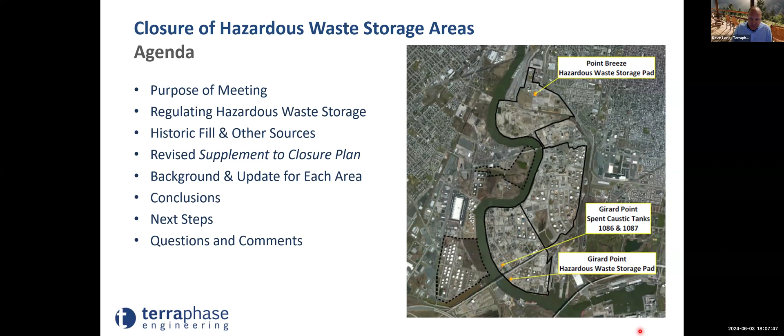So the purpose of this meeting is really just to catch everyone up, to give everyone an update on the status of where we are with regards to this closure effort, and then also to give each of you an opportunity, if you wish, to ask any questions related to this overall closure process.

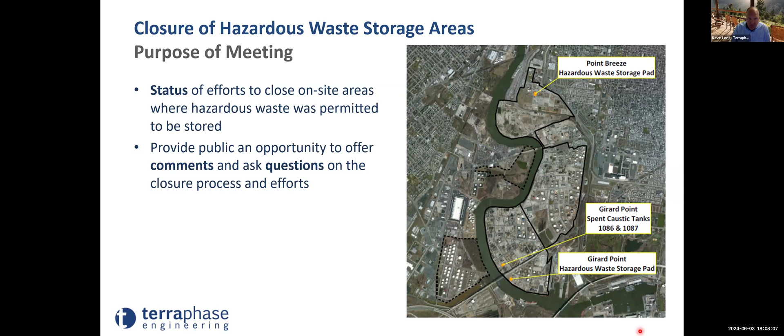Now, I want to step back a little bit and touch on hazardous waste and the regulations that pertain to it, and then even the hazardous waste closure process itself.

So hazardous waste is material that is generated at industrial sites, including at refineries. There are different classifications or categories we put hazardous waste into. You may hear them referred to as toxic or corrosive. You can see them on the left-hand side here: ignitable and reactive. Those are the categories that we give hazardous waste.

There are federal and state regulations that govern the management of this material as it's generated at these types of sites. Those regulations not only govern how that material needs to be disposed of, but also how it needs to be handled immediately from its creation all the way to its eventual disposal.

Part of those rules require or provide for an opportunity for limited areas of a site to be used for storage. In this case, the three units we talked about on the previous slide. Those storage units give a facility something that they can temporarily, for a short period of time, manage that material before it can be moved off-site for proper disposal.

Now, those storage areas actually have to follow very strict guidelines. In addition to undergoing inspections, there's all sorts of labeling requirements and record-keeping protocols that the facility has to use in handling this material. Now, when a storage area gets to a point at which it's no longer needed, it will go through a closure process.

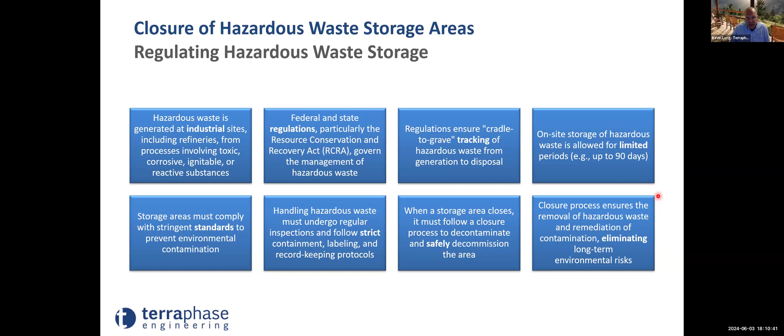So as a bit of additional background, one of the things that has been observed throughout the entire facility is fill material in the form of gravel or used asphalt, in some cases brick, that was used to actually level certain areas of the site and other areas of Philadelphia as part of historic development. These are low-lying areas that were filled with these types of materials, and the state refers to this type of material as historic fill.

Historic fill can oftentimes include things like certain metals, so arsenic and lead are examples. You can also find low levels of certain chemicals that we refer to as semi-volatile organic chemicals. Part of that group includes another family called polycyclic aromatic hydrocarbons. You may hear me during the course of these slides refer to PAHs. That's really what I'm referring to, certain chemicals that fall into this semi-volatile category that we find commonly in this historic fill material.

What PAHs really are is just the result of organic material that has gone through what's called incomplete combustion, basically burning. So you can find it in situations where you have burned wood, gas, or oil.

You can even find these chemicals on the charred portions of grilled meat. Any organic material that goes through incomplete burning ends up generating these chemicals as a result.

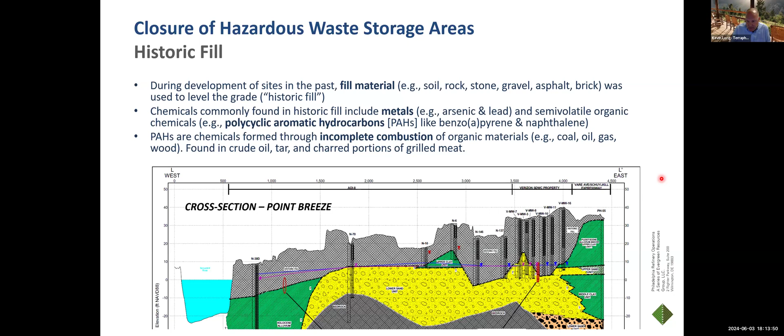The other condition we have here involves other impacts that may be associated with other aspects of operations at the refinery that previously occurred. You'll hear me refer to these as pre-existing contamination, or contamination associated with other refinery-related activities.

This is important because when we go through the process of closing these types of units and conduct sampling, one of the challenges is figuring out whether what we found is associated with an actual release from a unit like this, or whether it's associated with other aspects, such as fill or other sources of contamination.

That's not to say that contamination from other sources like fill would be ignored or tossed aside. In fact, it would be managed in a different way under a different program. You'll hear me refer to this as Act 2, which I'll get into in a bit. Any contamination identified that we determine is not associated with these units would then be addressed under Act 2.

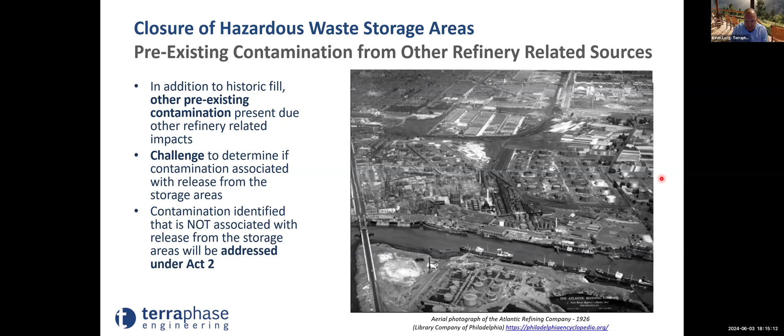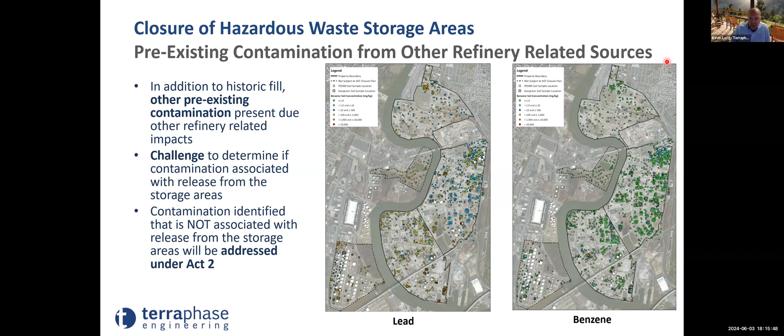That can include things like lead, which can also be associated with historic fill. The graphic in the middle of your window is a presentation of all the soil sampling locations where lead has been analyzed at the site. You see the same thing here for benzene. We can use this information to help us understand whether what we find is associated with a release from a unit, or whether it might be associated with these other sources.

I previously mentioned Act 2. Act 2 is a cleanup program established in the mid-90s by PADEP. It encourages the cleanup of various types of sites, and part of that program establishes standards or cleanup levels that we can use to make decisions about the need for action, or to understand the nature and extent of contamination using these generic cleanup levels.

These are referred to as medium specific concentrations, or MSC for short. The image on the right-hand side is an example of one of the tables presenting these cleanup levels. This table shows, for a list of chemicals, numbers based on residential exposure and others based on non-residential exposure. These cleanup levels are divided into two groups: numbers based on direct contact exposure, meaning humans actually coming into contact with chemicals in soil.

And then there's a second set of numbers associated with the protection of groundwater—chemical concentrations in soil that, if met, should not pose a risk to groundwater, which would be a problem if that groundwater were used for potable purposes and those contaminants were to leach.

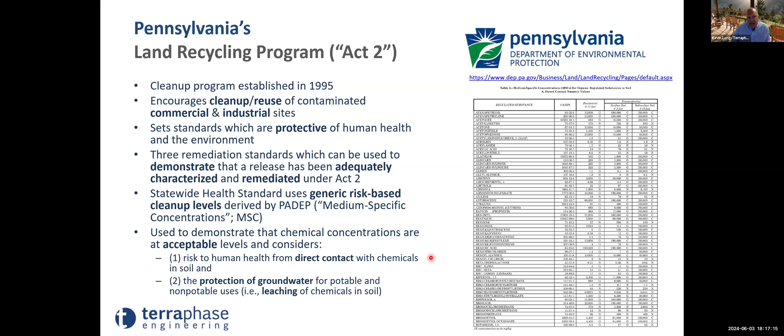I'm going through this because, as part of this agreement with PADEP, and the supplement to the closure plan I mentioned, part of it involved using these generic cleanup levels as a tool—even though we're not doing this under Act 2—to help us understand whether the conditions of clean closure were met or whether more work needed to be done.

So this supplemental agreement between PADEP and PESRM involved, after demolition, the collection of soil samples, and then comparison of what we find in those soil samples to these generic cleanup levels.

If the concentrations were equal to or less than these generic cleanup levels, the state agreed that would be a condition in which we could conclude we had met the requirements of RCRA clean closure.

Now, if we had concentrations above that, it just means we have to do more work. That additional work involves first trying to determine whether what we found is related to an actual release from the pad or the unit, or whether that contamination is potentially associated with other sources.

If it is in fact related to the pad, then as part of this closure effort, we would have to conduct a more rigorous risk assessment, determine whether there's actually any unacceptable risk to public health and the environment, and if so, implement a remedial action.

However, if the contaminants we find are not associated with a release—say they're related to fill or another source—then we could conclude that, at least with regard to closure of these areas, the requirements for clean closure are met. That contamination would then have to be managed under Act 2.

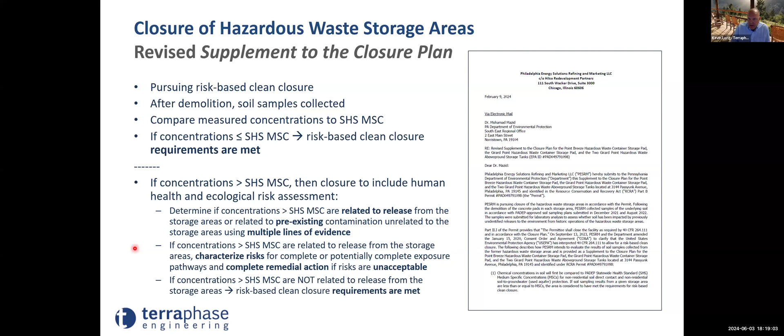So I'm going to start with the Girard Point spent caustic tanks. This is the area to the north, in the northern portion of the former refinery.

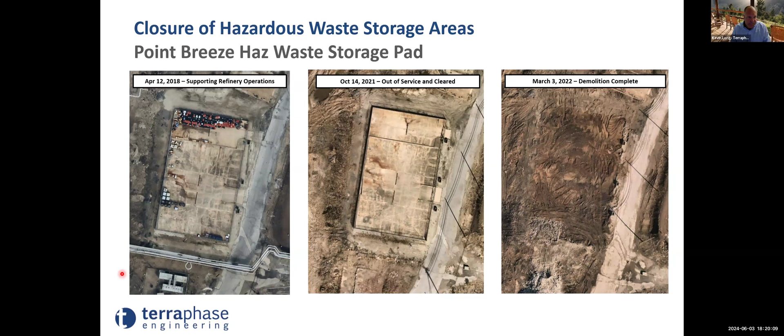So the way this process played out, individual plans were created for each of these areas that spelled out, for the state's review and approval, how soil sampling would be conducted, where, and to what extent, in order to help us understand whether these pads or units have had any releases of what they were managing to the environment.

In the case of the Girard Point spent caustic tanks, the plan was submitted in 2021. Sampling was conducted over 2 months during 2022, and it basically involved the collection of about 50 soil samples and the installation of 46 soil borings, yielding about 50 soil samples from those borings.

You'll see in a slide pretty soon that the actual sampling locations established in this plan were a mixed bag. There were locations biased or targeted toward areas of the pad specifically designed to collect fluid material—areas where there would have been a greater likelihood of a release, so good places to look.

So there were targeted locations. There were also locations randomly distributed in order to give us good broad spatial coverage across the pad, and I'll show you those in a second. And then there was some subsequent sampling done as a follow-up effort to help us understand the spatial distribution of some of the things found in the March sampling.

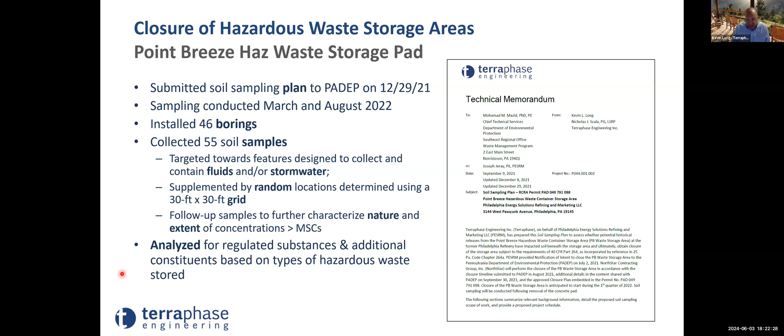Each of the samples was analyzed for a group of chemicals that are routinely used in analyzing soil samples at the refinery as part of lots of different activities, whether that's stuff under Act 2 or other purposes. But then the sampling list, the actual analysis list, was expanded to include chemicals that were also potentially present in some of the hazardous waste materials stored on this pad. So the list of chemicals analyzed as part of the sampling conducted in this area was fairly broad, and the state had a chance to look at this and give us some input and feedback.

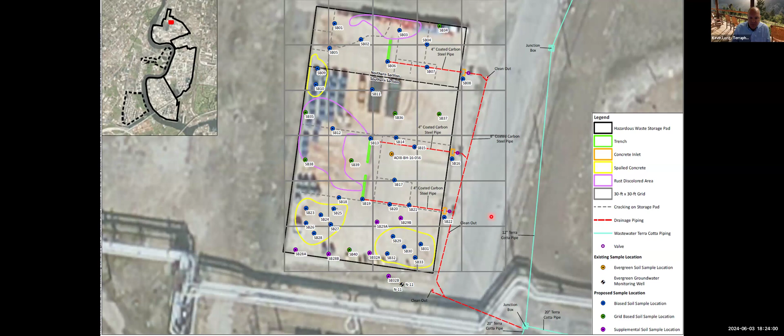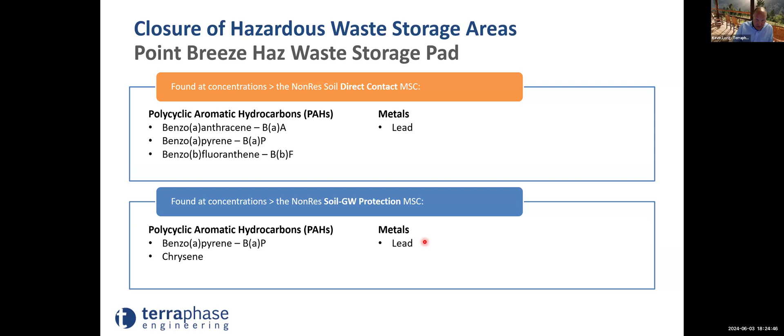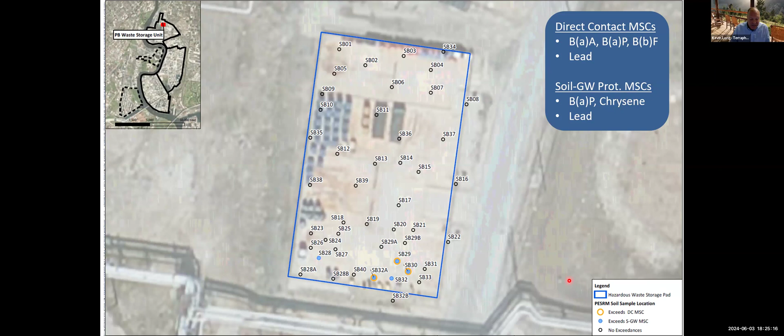This is a graphic to illustrate where those concentrations were slightly higher than the MSCs. You can see this legend will give you a sense of that - the direct contact concentrations are in these orange locations, and the blue shows where we had soil-to-groundwater concentrations greater than those MSCs. Now, one of the things observed in all the sampling - not terribly surprising, same as what was seen in the northern area - is that fill material basically underlied this entire unit.

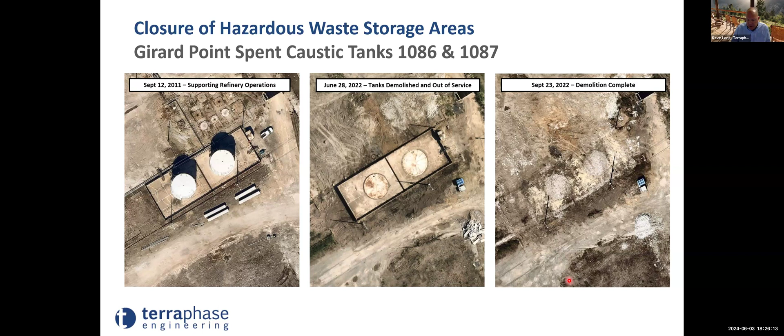Just like with the Girard Point spent caustic tanks, a plan was prepared and issued to the state. It was a smaller area, so it involved fewer borings and fewer samples, but the same approach was used - targeting locations we expected to have the greatest likelihood of finding releases, if there actually were releases, supplementing them with some random locations just to fill out the spatial distribution of what we might find.

Samples were analyzed for that very broad suite of chemicals, including materials or chemicals from the materials that might have been handled or managed as part of that waste stream. And then, unlike the other two areas, you won't see this with the Girard Point hazardous waste pad, but in this case, spent caustic is actually quite...

It's material that has a pH, which is really just the level of its corrosivity, a pH that is pretty high. So it's similar to, say, bleach, or like oven cleaner - that's a good one too. The material, spent caustic itself, would have a really high pH, I believe somewhere around 13.

And so one of the things that we added for this specific area to help give us another piece of information that might indicate or hint at a release if one had actually occurred, was we actually measured the levels of pH in soil, so that we had a soil pH meter, and it allows us to get readings of the levels of pH in the material that we were sampling.

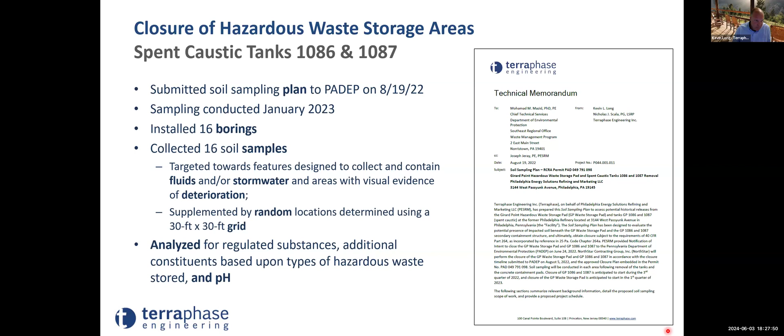Same with the Girard Point spent caustic tanks. You can see the locations, how they were laid out, again focused towards places where we expected to find releases if they had occurred, and then supplemented by a couple of locations. In this case, rather than a gray grid, you can see I've got a yellow grid on this figure, and you can see how those sampling points laid out.

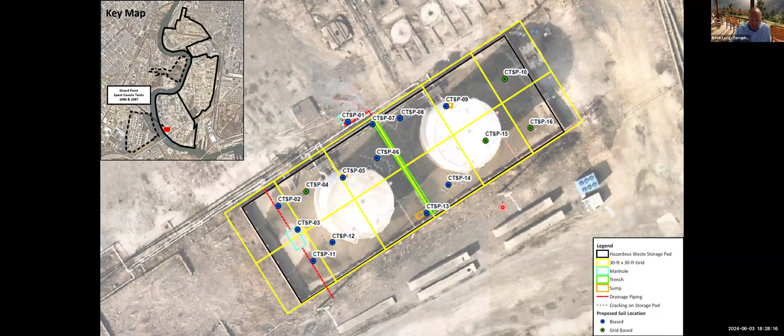In this case, we found a lot less. We found nothing that exceeded the direct contact cleanup levels, and only benzene and lead were found in soil at concentrations greater than the soil to groundwater protection cleanup levels.

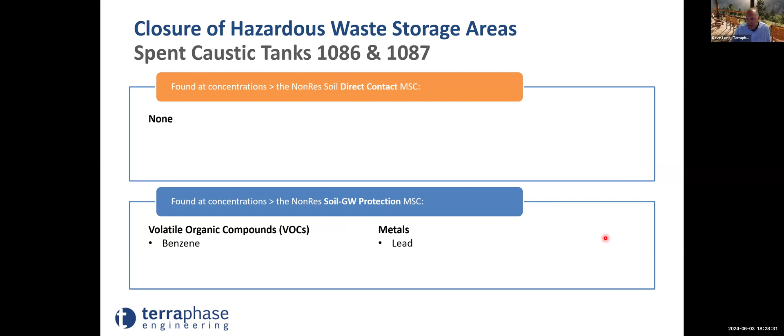And then the next slide, you can kind of see where some of those were found. I put on this slide the pH readings that we got from soil range between 6 and 8.2. Those are actually really close to what we would refer to as neutral pH. Neutral pH is 7. Thankfully, we didn't see any evidence in the soil pH readings that would hint at an actual release to the environment from these caustic tanks.

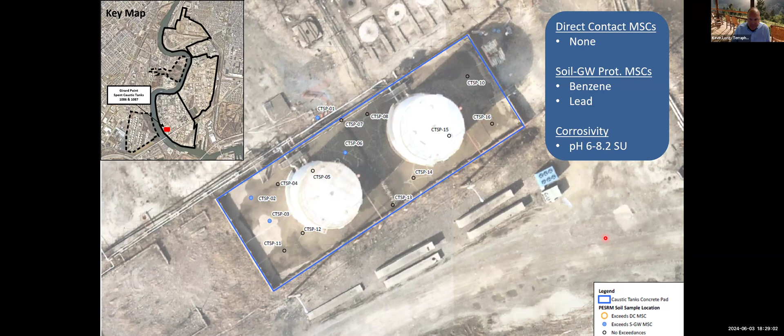The last area is called the Girard Point hazardous waste storage pad. I'm showing you an image of when the pad was actually being used to support the refinery's operations. What was unique about this pad is it was actually used to support some of the demolition and decommissioning of the refinery itself. So this pad actually stayed in use for a longer period of time, a couple more years.

And then you can see in 2024, we've got an image there of where you can see the pad has been actually demolished.

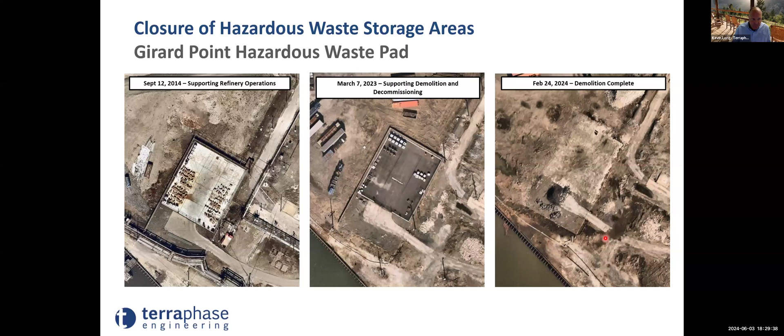Hopefully you're not getting too bored with the repetitive nature of this, but same thing. The plan was submitted to the state. The state reviewed it and approved it. We biased our locations, and we supplemented them with locations that were selected on a 30-foot by 30-foot grid.

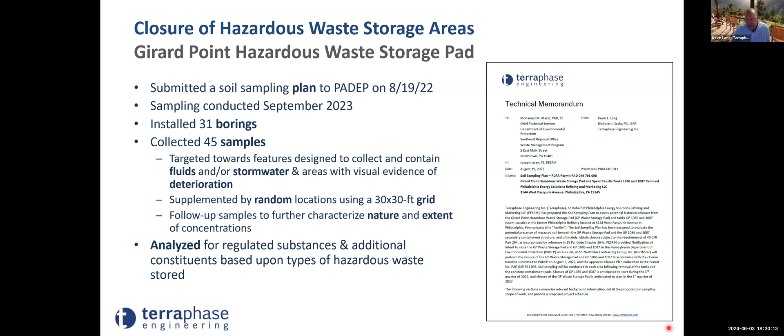And again, in this case, we actually collected some additional samples just to help us get some better sense of the nature and extent of what was found. And the same thing, the chemicals that were analyzed included those things that we are normally looking for at the refinery, but then supplementing them with chemicals that we thought could be present in the wastes that were actually stored temporarily on this pad.

And then this is the graphic that just shows you that. Again, I used a yellow grid in this case, but again, targeted locations supplemented by the grid-based approach, and then there was additional follow-up that occurred after.

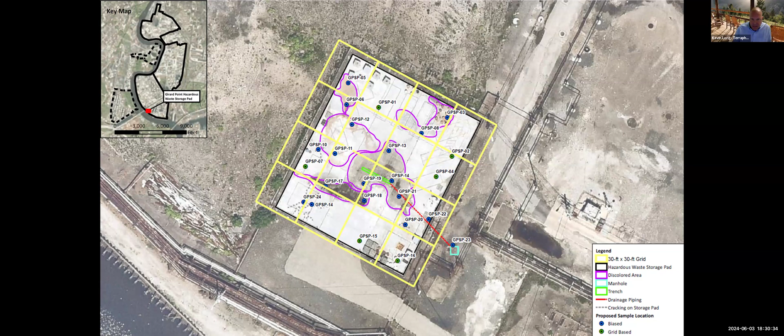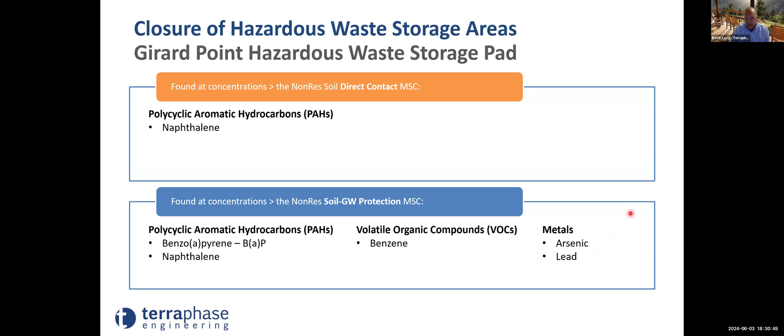And then this is an image that basically shows you the distribution of those concentrations, roughly.

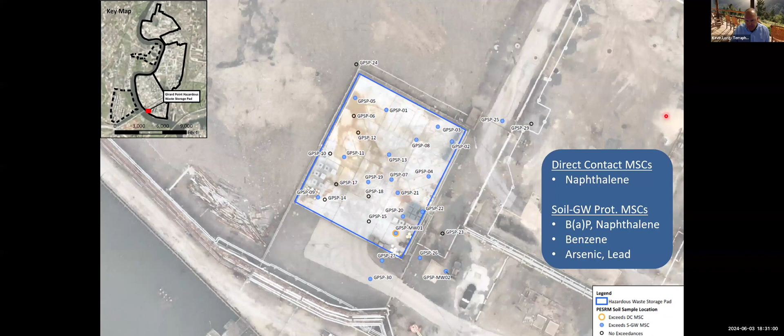So just to pull all this together, we have 3 areas. At the Point Breeze storage pad, we found PAHs and lead. At the Girard Point spent caustic tanks, we found benzene and lead. And then at the Girard Point storage pad, we found VOCs, specifically benzene. We found 2 PAHs and arsenic and lead. So everything else that was analyzed was equal to or less than these generic cleanup levels. These chemicals really represent the things that we needed to do more work, more thinking, to understand why they're here.

Are they associated with a release from these units, or are they associated with something that's unrelated to these units? Just to flash a little bit to the conclusion, and I'll go through this in more detail: the PAHs and the metals, the arsenic and the lead, we were able to determine are associated with historic fill. Not terribly surprising, but that was the conclusion from the work we did.

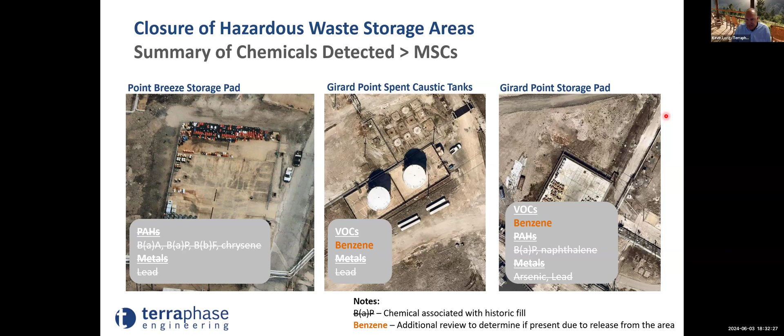With regards to benzene, we had to do some additional work. What's established in that agreement with the state, the supplement I mentioned earlier, was the application or use of several lines of evidence as a tool to help us determine when we might have a release from a pad or a unit, or whether we're finding something not associated with the unit.

In the case of benzene, which is unique because it wouldn't be something we'd expect to find associated with historic fill, we know that's not the reason benzene was found in those 2 areas in the south. But benzene is a chemical we see across the facility at low levels.

In the case of these 2 locations, the caustic tanks and the Girard Point hazardous waste pad, the concentrations of benzene we found are very consistent with the low-level conditions we see across the facility. So the spatial distribution of what we found in proximity to these 2 areas is indistinguishable from what was found across the entire facility as a kind of low-level impact.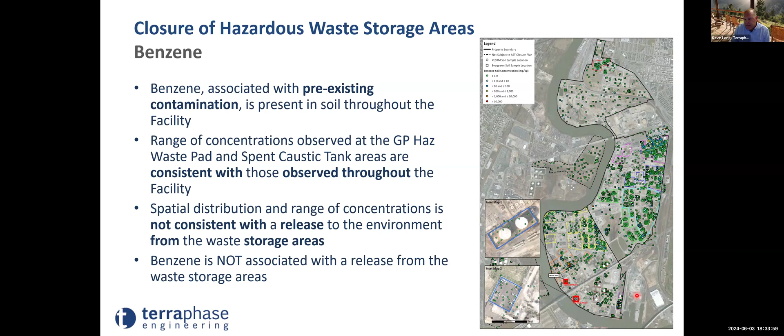So our conclusion in the case of benzene, using this information, was that it is not associated with an actual release from these particular units. It's contamination that will have to be managed under Act 2, but it's not impacts associated with these 2 units. Now, this is a graphic intended to capture...

...the conclusions or elements of those individual lines of evidence that were noted or discussed in the agreement with the state. Again, these are a list of tools or questions we go through to help us figure out whether what we found is associated or potentially associated with a release from the unit, or whether it might be associated with some other condition that would have to be addressed under Act 2. So the types of things we asked.

First, probably the most important thing I mentioned earlier, is that these areas are subject to significant tracking, reporting, and documentation. And thankfully, we don't have any documentation of any actual known releases from each of these units.

Another question is, could the chemicals we found have been associated with what was stored here? Well, the answer to that is yes. We looked for them specifically because there was a potential for them to have been managed or handled in each of these areas.

We looked at the spatial distribution of the chemicals and asked ourselves, is there evidence based on the spatial distribution that would suggest an actual release? We asked ourselves whether the chemicals could be associated with historic fill. As I mentioned earlier, historic fill, you're potentially going to see things like metals and PAHs, but not necessarily benzene. The other question is, are we finding chemicals associated with historic fill?

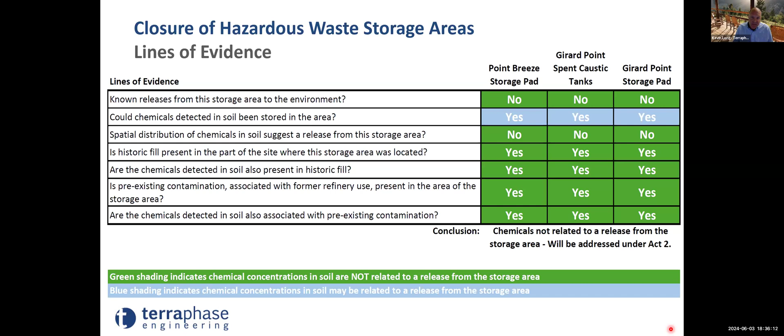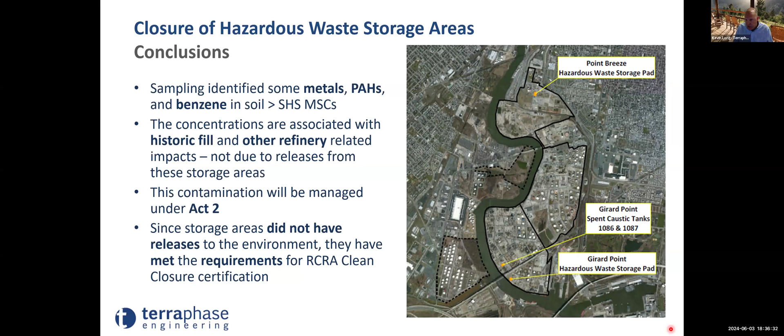...that small set of chemicals, the PAHs, the metals, benzene. These are chemicals that will have to be managed under Act 2, but they're not evidence of releases from these individual storage areas. So what we're seeing are impacts from historic fill, from other activities, that have to be managed under Act 2. And since the storage areas did not actually have evidence of release to the environment, we're proposing to the state that the obligations for clean closure have been met for each of these 3 units.

Currently, the state is reviewing 3 reports issued for each of these areas. They present the content I basically just walked you through during this discussion. If the state has any feedback, next steps will include addressing any questions they might have, and then finalizing those investigation reports. Subsequent to their approval, PESRM would then submit a request for closure to get certification of the actual closure of these 3 units.